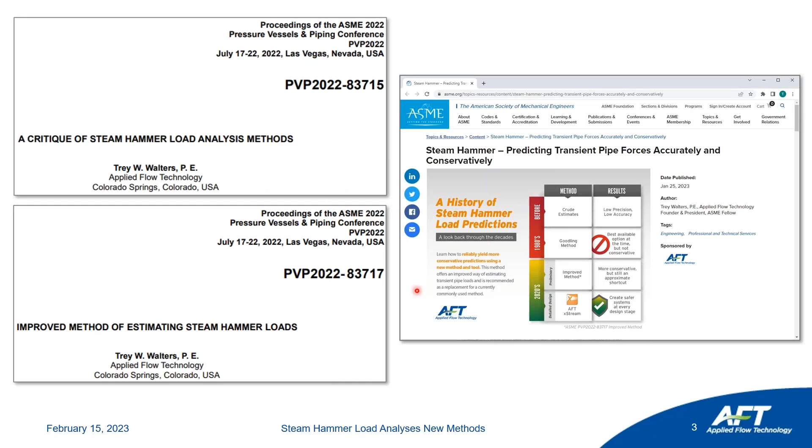So we'll do part one first, which is to critique steam hammer load analysis methods. Part two is going to be quite a bit shorter.

Let's start with the good news and the bad news, beginning with the bad news. The bad news is that forces from steam hammer in nuclear and fossil power stations have been significantly underestimated for the last 40 years.

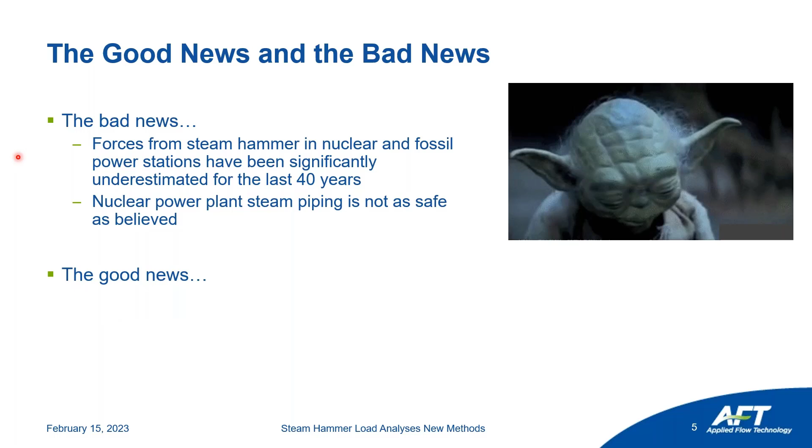Nuclear power plant steam piping that uses these common methods is not as safe as most people believe. But the good news is that new methods and tools have been recently developed which will more accurately and conservatively predict loads on steam piping.

The tool we're talking about more specifically is one we released a couple of years ago called xStream, currently on version 2. Also, thank goodness for the safety factors used on previous designs that helped keep things working, hopefully without any significant issues.

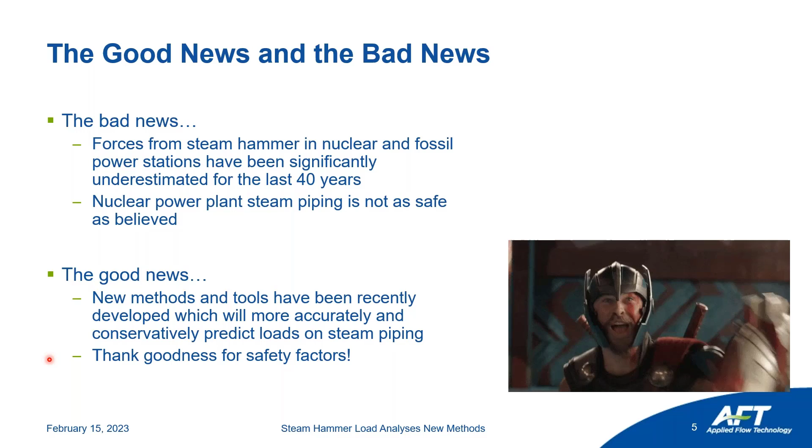But there are safety issues there that we recommend, and I will at the end point people to go back and look at that.

This is a screenshot on the right that I have shamelessly taken from a paper by Rovagnati and Gray, who published a paper at the PVP 2015 conference—there's the reference right there.

They had this graphic in their 2015 paper, basically showing what goes on in a case like a nuclear power plant, where you have steam coming off your steam supply, going through some longer pipes, ultimately into turbines, and then down here you have turbine stop valves.

When there is some sort of upset condition, the goal is to close these stop valves as quickly as you possibly can to protect the turbines.

Typical closure times are effectively about 100 to 200 milliseconds. They actually have longer closure times, but the times that actually drive the steam hammer waves are more like 100 to 200 milliseconds. When that happens, it sends a pressure wave traveling at near acoustic velocity back towards the steam supply.

So a wave is generated at these valves and travels back through the piping towards the steam supply, and any elbow pairs you have are going to see forces. Those imbalanced forces from this transient need to be handled by the structural supports, and this is often called a steam hammer.

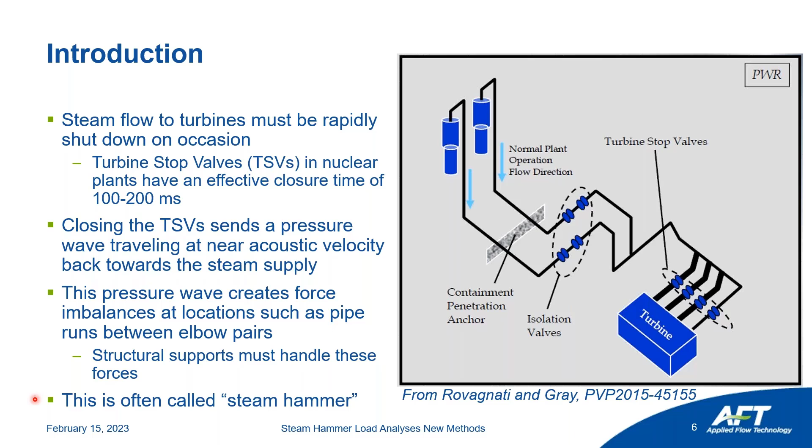Some background: the work in this paper is derived from two occurrences. One is that there were 4 papers at ASME PVP conferences from 2014 through 2018, from multiple authors, which questioned the conventional method based on the work of Goodling, who himself published a paper back in 1989 at a PVP conference. His method, which was certainly an improvement at the time, is something we're going to show today is not as conservative as people thought over the last 4 decades—and we're going to talk about why.

The other development is the new commercial simulation tool, xStream, released in early 2021, designed to simulate specifically transient compressible flow, including steam hammer.

There was also another paper that was supposed to precede these two papers at the 2022 Power Conference, but it got delayed by COVID a couple times. It still hasn't been published. It's called 'How Fast is a Finite Gas Transient Wave and Why Does It Steepen?' I'm a first author on that, and it will be published at the PVP conference this year in Atlanta. So that paper was supposed to come before these ones, but just because of conferences being rescheduled and canceled, it's coming out after.

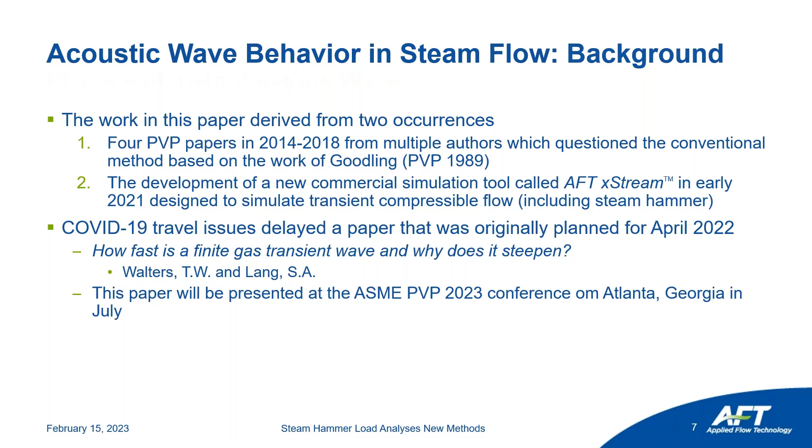Let's talk about acoustic wave behavior in steam flow, and just the physics of an instantaneous wave.

Before considering the flow of real gases with friction and heat transfer, let's make things simple and consider a case with a perfect gas, adiabatic flow, frictionless horizontal pipe. You've got flow coming in from point 1 to point 2, and there's a valve, and what we're going to do is close that valve instantly. So what happens to the gas flow right now? We're not even to steam yet, we've got a perfect gas. So what happens with the physics?

This idealized case has constant thermodynamic and fluid dynamic properties everywhere because it's frictionless. There's a velocity v and a speed of sound c. Assume the valve closes instantly at t equals 0.

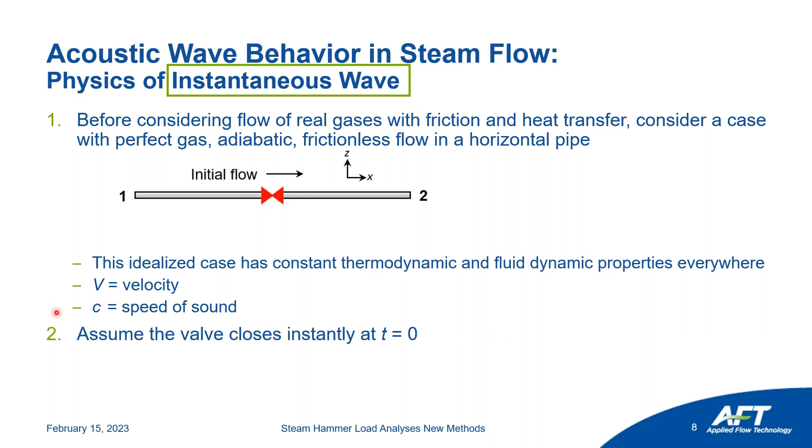There's two waves that are generated that travel upstream and downstream of the valve. Upstream of the valve is a compression wave. That compression wave is traveling against the direction of the bulk fluid flow, the gas flow, and it travels at a velocity of v minus c. C is greater in magnitude than v, so this is actually a negative number, but our coordinate system has x going from left to right, so this is going to be a negative wave speed, and it's equal to v minus c. There's another wave which is generated, and that's downstream of the valve.

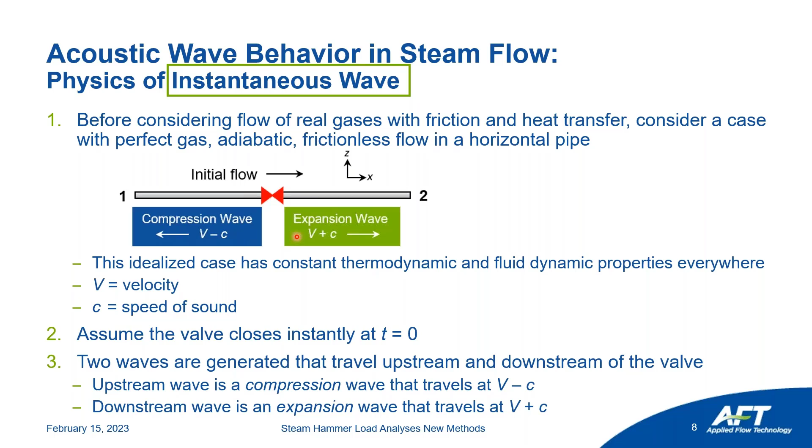That's an expansion wave, and it travels at v plus c, traveling to the right. So those two waves are generated, and in our case with perfect gas, adiabatic, frictionless flow, horizontal pipe, they travel at a constant wave speed, both to the left and to the right.

So let's dig into this a little bit more. We just talked about this. What we're going to focus on right now is more on the compression wave, because that's the one that causes issues with forces on the elbow pairs. Let's take a case where we look at time and distance x along the pipe, and see what the waves are. Here we're going to look at both waves, compression and expansion. Later, we're going to focus on just the compression wave.

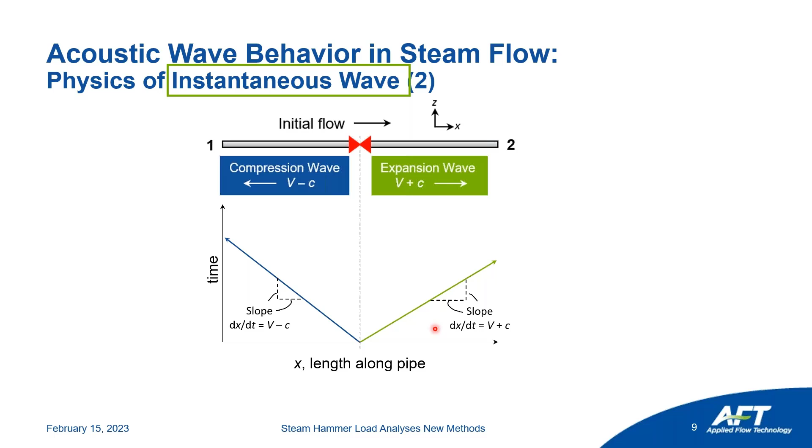This is an instantaneous wave, so the wave actually travels in time over this distance from left to right, and the slope here is the wave speed, and it's v minus c. Now on the right, it is a different slope, traveling at a higher wave speed, which is v plus c. So that's how it travels, and that's the direction of those two waves.

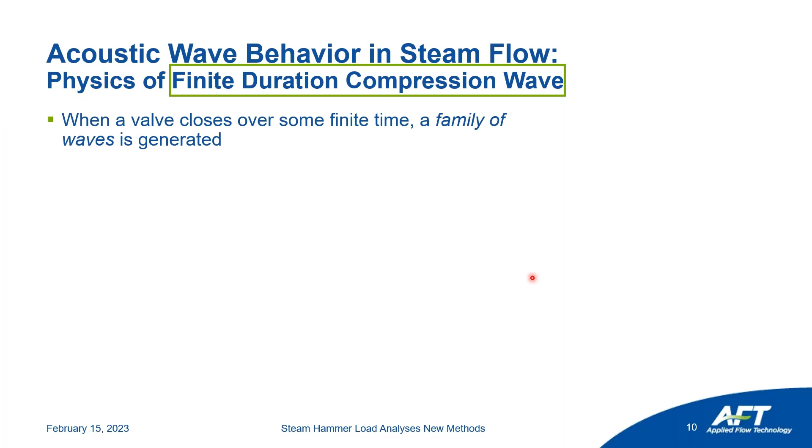Now let's move from an instantaneous wave when we close the valve instantly to a finite duration compression wave, which is what happens when you have a valve which doesn't close instantly, but closes over some finite amount of time. When that happens, there is not a single wave which is generated, but a family of waves. What do we mean by a family of waves? We're going to talk about it here.

We're going to talk about the upstream of the valve now, and not worry anymore about the downstream of the valve. Upstream of the valve, we're going to close this valve, and it's been shown by others in the literature that it tends to be roughly about a constant velocity versus time, fairly linear, and constant flow rate versus time. We're going to assume that this valve closes in such a way that the gas velocity goes from the initial steady state velocity at the valve, and closes over some time tc. Then the valve is completely closed. So let's look at what happens.

We're going to introduce two new subscripts here, F and B. F represents the front of the wave family; this is also the steady state conditions, SS. B represents the back of the wave family. At t equals 0, just before the valve closes, there's no waves being generated. Right when the valve initially just starts its first incremental movement, closure, and there's a change in velocity, a wave is generated, and it travels up the pipe back towards the supply conditions. That wave travels at the initial velocity v minus the initial sonic velocity c - that's the slope of that line.

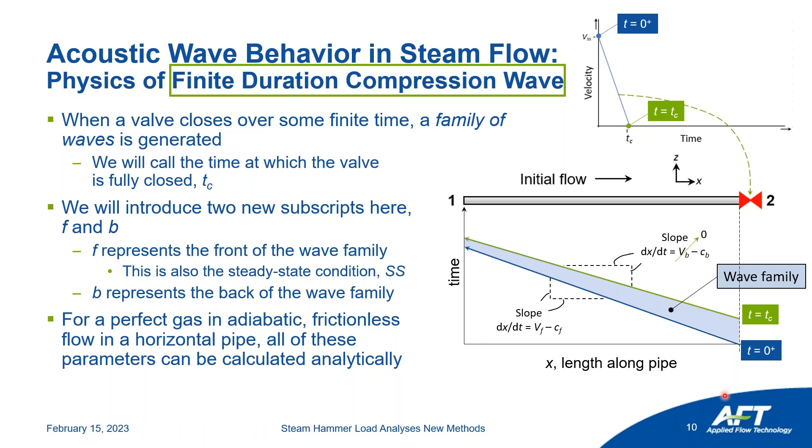So everything that's actually happening here that's interesting happens between the blue and the green lines. For a perfect gas, an adiabatic frictionless flow, and a horizontal pipe, all of these parameters can be calculated analytically.

So what happens when this wave is traveling down a pipe and it goes through, for example, an elbow pair? Let's take a case right here where at the top we have a case where no transient has happened. So there's steady state fluid velocity V, and it's constant because we're talking about a no-friction case. At this elbow pair up here, the velocity is just equal to the steady state velocity, and the pressure is equal to steady state pressure. Same thing down here at point 2, okay, and there's no imbalanced forces.

At some certain time, the valve closes instantly. It's somewhere downstream, and it's generating a wave which is traveling back towards the source. This is the acoustic wave. It's traveling at V, the steady state velocity, minus the steady state sonic velocity C. At this point in time, this gas on the right has been brought to stop.

V equals 0, and the pressure is now at a high pressure. And so this higher pressure here is generating a force, and it's pushing this assembly between these two elbows. It's pushing it to the right because there's higher pressure here than here, and so there's a force that pushes it to the right. And that force can be predicted.

And so with the force versus time profile, you can see when the wave first enters into the first elbow pair, the force goes up. And that force is not exactly equal to, but roughly equal to on a first approximation, the high pressure minus the steady state pressure down here, the pressure difference times the area, okay?

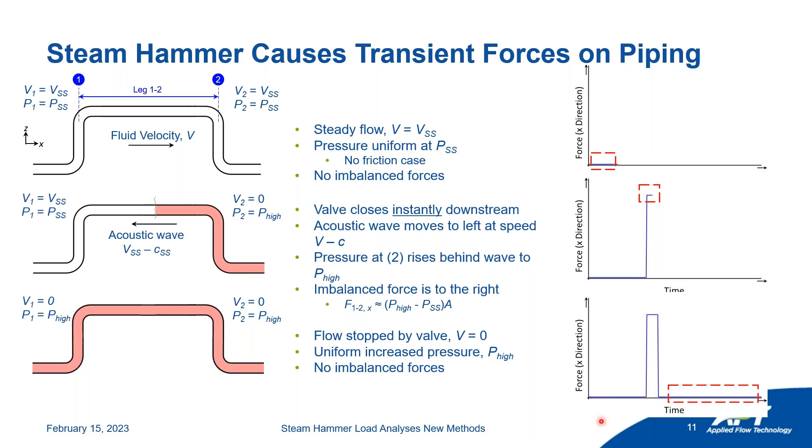All right, so we've created a little video that shows what happens as the wave moves through. I'm going to play this video here. I think I need to change my pointer options to turn off the laser pointer.

Okay, so what you're going to see is initially there's some flow going through. The valve closes, the wave comes in. As the wave goes through there, it causes those elbows to move. At first it pushes it to the right, but then there's a reaction because of the

elasticity in the system, and the elbow pairs move back and forth. Now they're going to move unless they're restrained. If they're restrained, there's not going to be any movement, but the restraints that are put there have to take that load, whatever that load is.

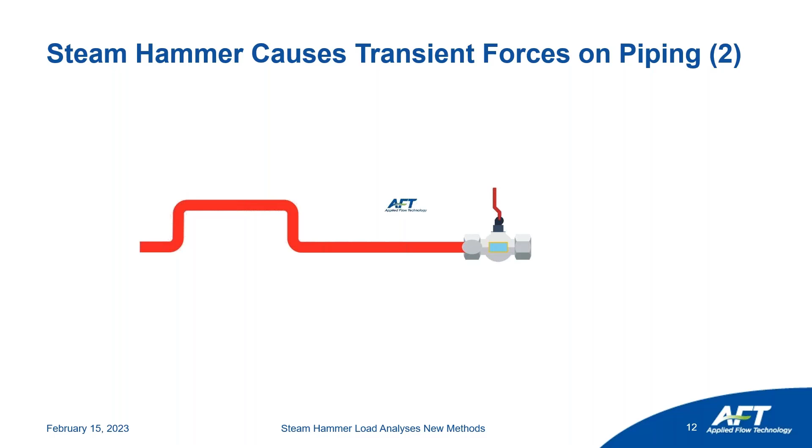So the question is, what is that load, how high is the force, and what does it look like over time? That's really what we're trying to get at today.

So we're going to go on, and if the wave is an instantaneous compression wave, so the downstream valve closes instantly, then the shape of the force versus time profile looks like this. It's like a step change, like a square wave, okay?

Now, that's an idealized case because there aren't any valves that close instantly. So you have a finite duration compression wave where the valve closes over some time, and it looks more trapezoidal like this, okay? So this would be when the first part of the wave family reaches

the first elbow right here. The force starts to go up, then it reaches a peak, and then it comes back down, and this is the point where the back of the wave family passes through the back of the elbow pair over here, and you get a force profile.

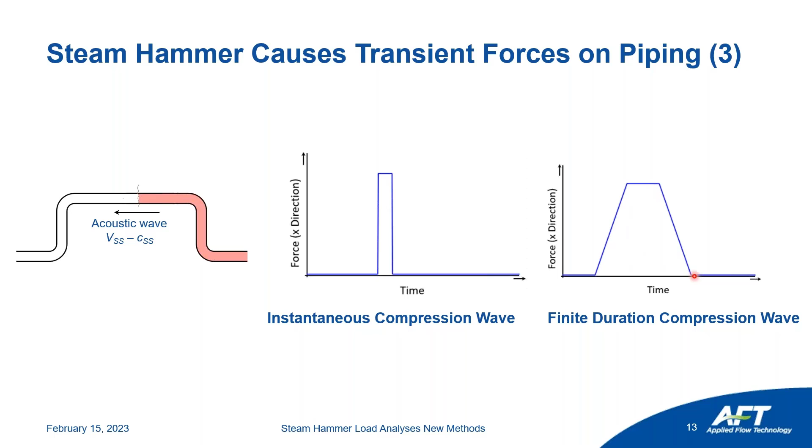So this is more realistic, and then the question is, how do you estimate this or predict what this looks like, and what's the peak force? That's what you care about, right?

So the traditional method is Goodling's method, who was a smart engineer back in the 80s who worked at Gilbert Commonwealth in Pennsylvania. Today, that company is now Worley, owned by Worley in Pennsylvania.

And the way that Goodling's method works is that you estimate a maximum force using a Joukowsky pressure approximation, okay? So what you do is you assume the valve closes instantly, you get a Joukowsky pressure delta PJ, you multiply it times the area, then you put a 5% fudge factor on, and that is the maximum force, okay?

Then you calculate something called the characteristic length. That is based on the steam acoustic speed, C. So it's the sonic velocity, the acoustic velocity of the steam, okay, at the steady state conditions.

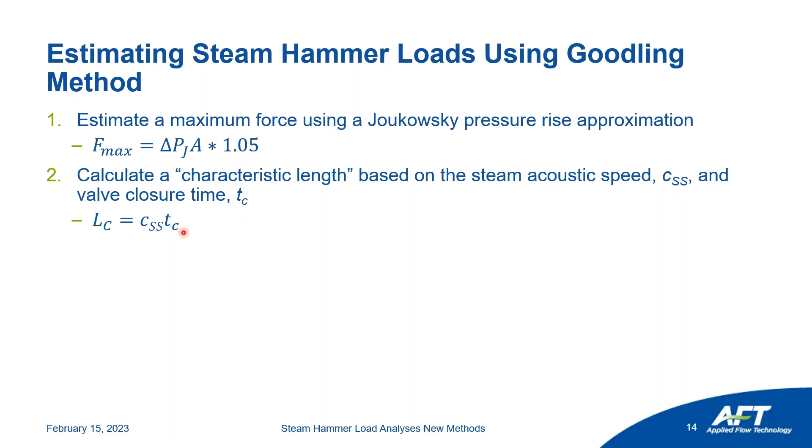And then you take the valve closure time, T sub C, you multiply those and you get something called the characteristic length. You calculate the maximum force on a pipe run leg based on its length.

So you have two elbows here. The length in this leg, we call leg 1,2. The length is L sub leg 1,2.

So that's the length. So what you do is you take this F max up here in step 1, you multiply it by the length of the leg, you divide it by the characteristic length, step 2, and that becomes the maximum force, okay? And if the leg length is greater than the characteristic length, then the maximum force on this elbow pair is just equal to the maximum force.

If desired, it's possible to estimate a force versus time profile that looks like this. And if you go back and look at Goodling's paper from 1989, he described a step-by-step way of how to do that.

Okay, so rather than use a relatively simple, straightforward algebraic form like we just talked about, if you want to get at this in more detail, how do you do it? Okay, so the simplified method is to assume adiabatic, frictionless, perfect gas, horizontal pipe flow, okay?

Steam doesn't really behave that way, but let's assume that it does. If that is how it behaves, then you have the equations of mass conservation, which is pressure versus time, and how it changes over distance with velocity. This is the density of the steam or the gas. This is the sonic velocity, and those have to balance to zero, okay?

Then you have momentum conservation. You can actually do a closed form analytical solution on this and solve for all of the flow field at any point, any location, any time using these two equations right here. But it's very simplified, okay?

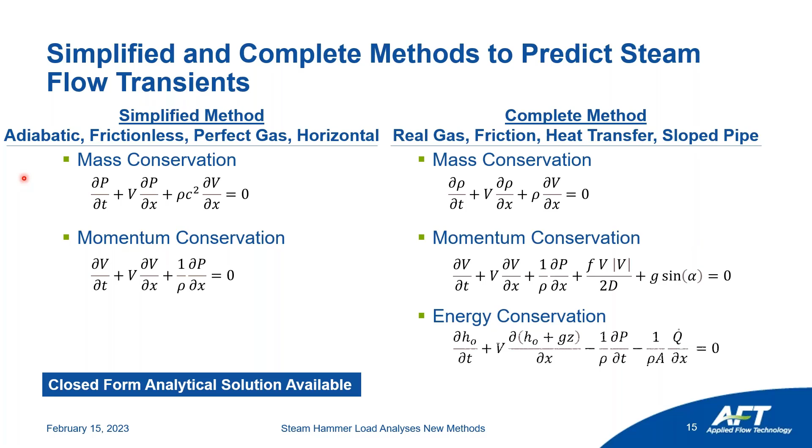So what does a more realistic solution look like? The more realistic solution is we have to bring in more variables here. Now we're talking about real gas, like steam behaves as a real gas. We've got friction, we have heat transfer, and the pipe can be sloped. So that complete method now accounts for everything within these assumptions. And these, you end up with 3 differential equations here: mass conservation, momentum conservation, and energy conservation.

Now, the form of these equations can be represented in different ways. This particular form is a really convenient way that was published by Fred Moody back in 1990 in a textbook that's referenced in these papers. And it's a very convenient formulation. But the only way to really solve these practically is to have a numerical solution. That's the only option, and that's what AFT xStream does. That actually solves all of these equations without leaving anything out fundamentally. So all of the fundamental principles here are included in the solution, okay?

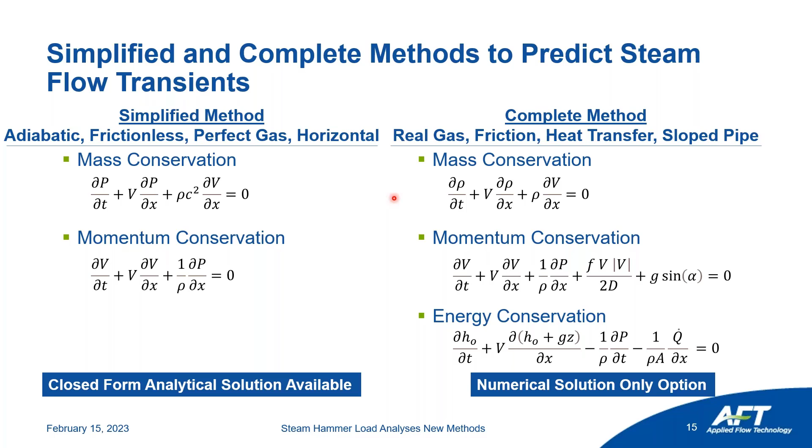So I found out something real surprising a few years ago, almost exactly 2 years ago. It was in early 2021. I was doing some beta testing on AFT xStream before we released it commercially, and I was looking at this problem that Ben Rovagnati and Gray published back at the ASME conference in 2015, and the paper number here. This is basically all the different parameters that they had in their paper, okay?

But the basic gist is that there's a pipe, this is the turbine stop valve right down here. This is the steam supply, at 1,000 PSI. I'm going to talk it in terms of English units, but we've got metric equivalents for everything here, so you can see that if you want to look at that, okay? So the turbine stop valve closes, and it closes in 100 milliseconds. That's what was part of the problem statement that Rovagnati and Gray put forth.

And then along the way, there's these green stretches where there's elbows that are basically 40 feet length on the elbows, and there's longer stretches in between. So there's actually 7 elbow pairs that we're going to look at. The elbow pair that's right at the steam supply, and then further distances out, all the way out almost 2,000 feet away, or 1,980 feet away. Okay, here's the other conditions you have here.

The pipe is a 30-inch nominal diameter pipe. Roughness, temperature, it's just barely above saturation. The flow rate is given here, and other parameters like what's the steady state velocity is 116 feet per second, et cetera, sonic velocity. Okay.

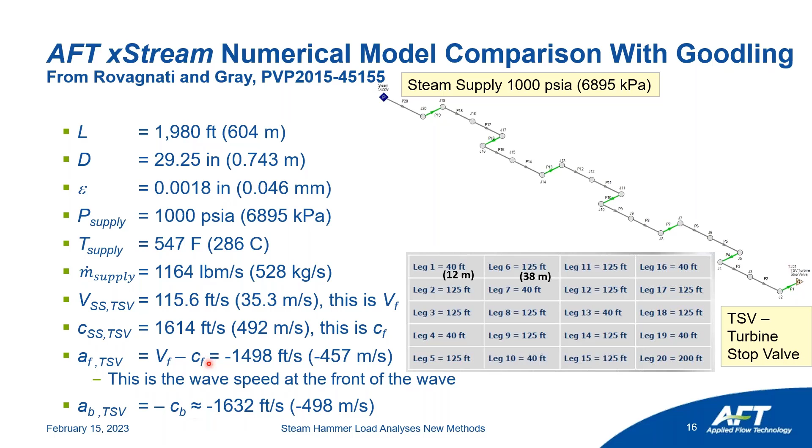The wave speed at the front of the wave is VF minus CF, and VF here is 115 feet per second. C, the sonic velocity, is 1614, so it's actually 1,498 feet per second at the front of the wave. The back of the wave is the minus of the sonic velocity at the back, and you can figure that out to be 1,632 feet per second. So you can see the back of the wave here has a higher magnitude velocity than the front, and that's why the back of the wave catches up with the front.

So this is what it looks like if you do a numerical solution, okay? The numerical solution here, this is where the turbine stop valve is down here, here's the steam supply. And we're going to look at what happens when you close this turbine stop valve over 1/10 of a second, 100 milliseconds. The very first wave is going to travel along the blue line. The back of the wave is the orange line. And this comes out of a numerical solution with AFT xStream, solving all of the real gas friction equations, okay?

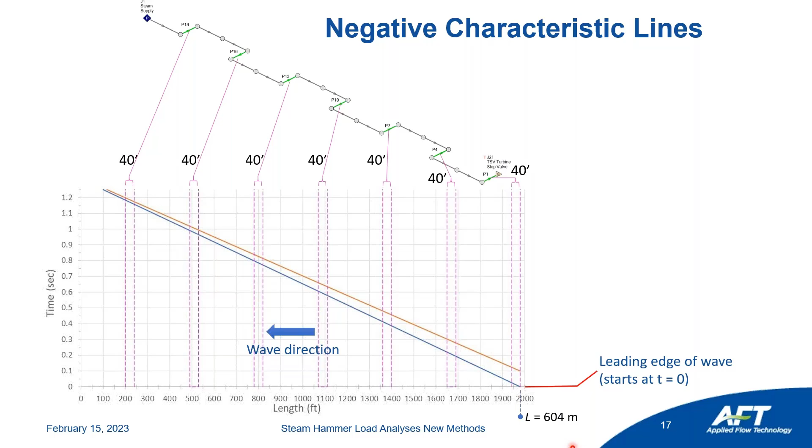Here's the leading edge of the wave. This is the back of the wave at t equals 0.1 seconds. And so those waves travel, and that orange wave travels at a different slope. And you can see as you go further out in time and down the pipe towards the supply, the back of the wave position is catching up with the front. Okay, this initial characteristic length that you can get just by subtracting what happens at 0.1 seconds is about 150 feet.

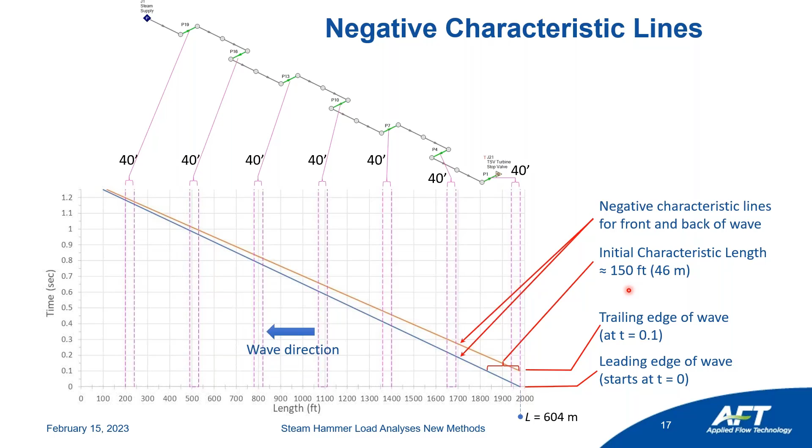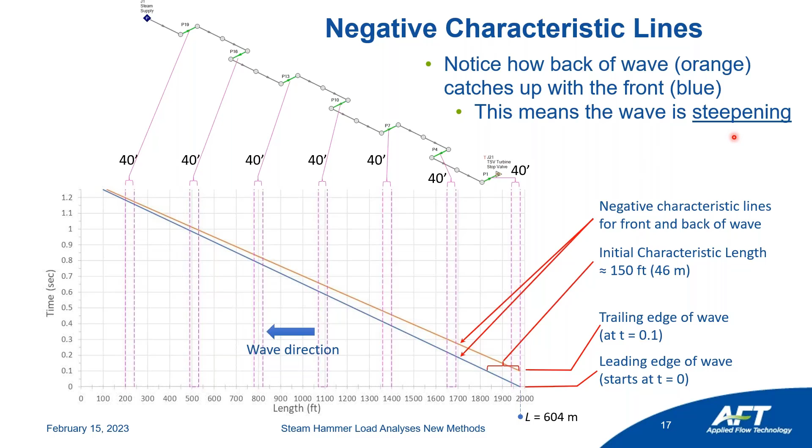You can see the characteristic lines shown right here. The important thing to see is that the orange line is catching up with the blue line, and that means the wave is steepening. So that has implications for the forces we're going to talk about.

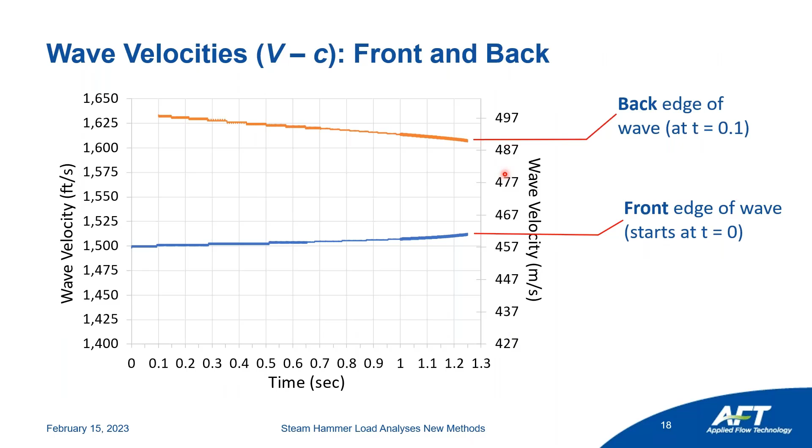What you can also do is take what I just showed you on the previous slides. You could subtract the positions here that you get out of the wave velocity, and you can actually say what is the distance between the front and the back of the wave.

At 0.1 seconds, when the turbine stop valve fully closes, you can see that distance between the back of the wave and the front is about 150 feet right here. But what happens is because the back of the wave is catching up with the front, as you go forward in time, the distance between the back and the front shrinks.

And so finally, you can see if you go out far enough, the back of the wave will catch up with the front of the wave, and it becomes basically a vertical shock wave. What this tells us is that the whole idea of characteristic length, which assumes this 150 feet is constant, is a flawed concept, and the engineering community should discard that concept.

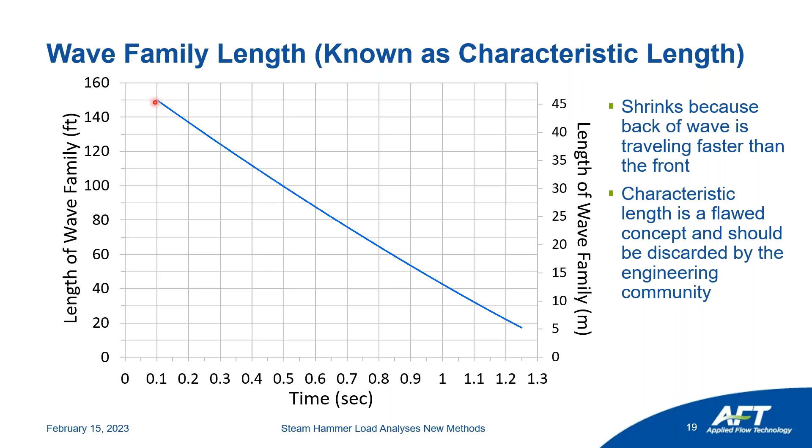There is no characteristic length. It does not exist. There's an initial length between the front and the back of the wave, but as time goes on, the back of the wave catches up with the front, and there is no characteristic length. There's a changing distance between the front and the back. And you can also see this in a numerical solution from AFT xStream.

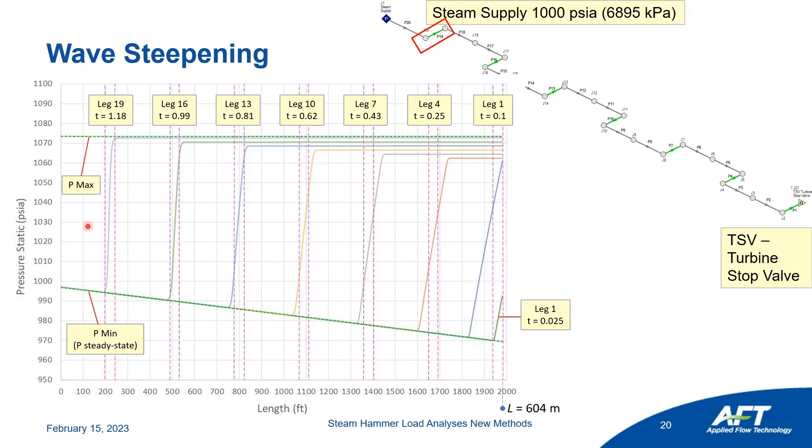What you can see is more and more of this wave is fitting inside this 40-foot length between the front and the back of the wave family. And if you get all the way down to this final elbow pair, the entire wave is inside that elbow pair, because the back of the wave has caught up with the front. What that means is the force is much higher.

So we can look at what those forces look like. I'm going to play you a quick animation here. This comes out of xStream, which can make this animation for you, and I'm going to go ahead and play that for you here real quick.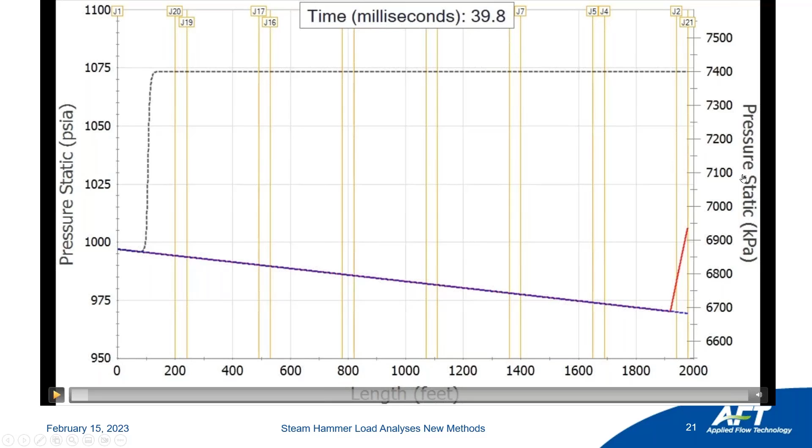So this is what happens with the pressure. Here it's in PSI, and this is kilopascals on the right, over the entire distance right here. You can see, and time is up here at the top in milliseconds. You can see as this wave goes down, it's just getting steeper and steeper and steeper. And that's just because the back of the wave is catching up with the front.

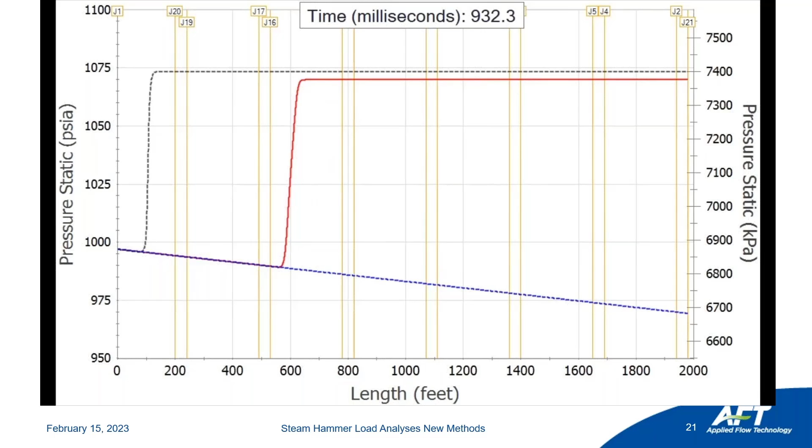All right, so let's go on from there. Now you can come in and look here at what's going on with the forces.

The interesting thing you see is that the forces on leg one, the first elbow pair, are about 15,000 pounds force, something like 60 kilonewtons. But because more and more of the wave is fitting in each leg—leg 4, leg 7, leg 10, all the way to the end—the force gets higher and higher.

The interesting thing here is that Goodling's method, which was developed four decades ago, predicts that the forces for all seven elbow pairs should be the same. But you can see that the elbow pairs further away from the source are much higher than Goodling would predict. That's why we're saying Goodling's method is not a conservative method. If you've used Goodling's method in the past, or you're using it today, you're not getting conservative results.

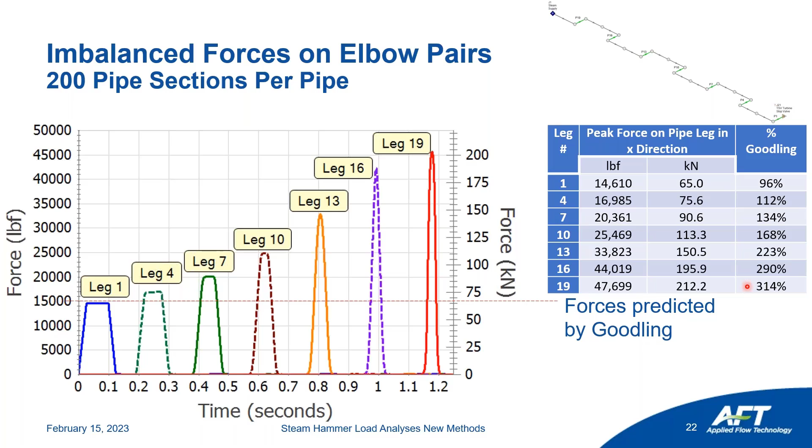These are the force predictions of these peak forces in a table—forces for leg 1 all the way up through 19, and this is the percent of Goodling. You can see that the forces on the final leg, leg 19, are over 3 times higher than Goodling would predict. So that's a little bit concerning.

There is some sensitivity to how you do computational sections in the AFT xStream model. As you add more sections into the pipes, the peak force that you get increases. So to get the peak forces you're seeing here, you need to use even more sections. When Ravignati and Gray did their paper back in 2015, they only used 40 sections and they didn't do a nodal sensitivity study.

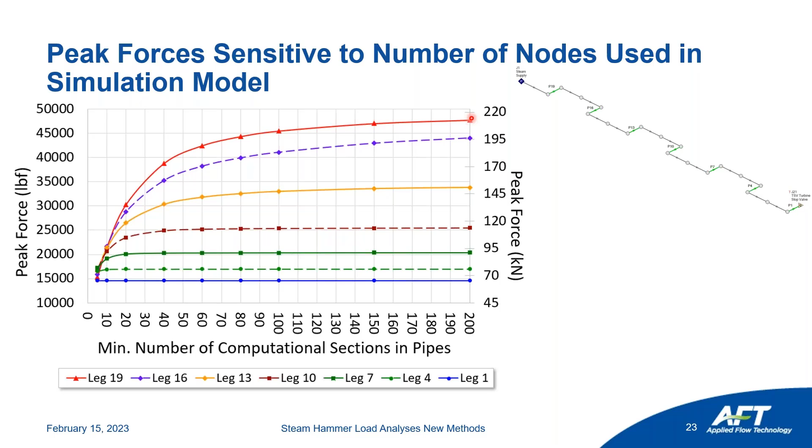So they were showing higher forces, but actually the story is even worse than Ravignati and Gray presented back in 2015, because if you put more sections in the numerical model, you get even higher forces. So be careful if you're ever using numerical methods to make sure you're using enough sections.

So how fast do the waves steepen? This is another way of asking how much faster is the back of the wave than the front. We looked at this chart earlier of the front of the wave family and the back of the wave family. The difference in speeds decreases over time in this example.

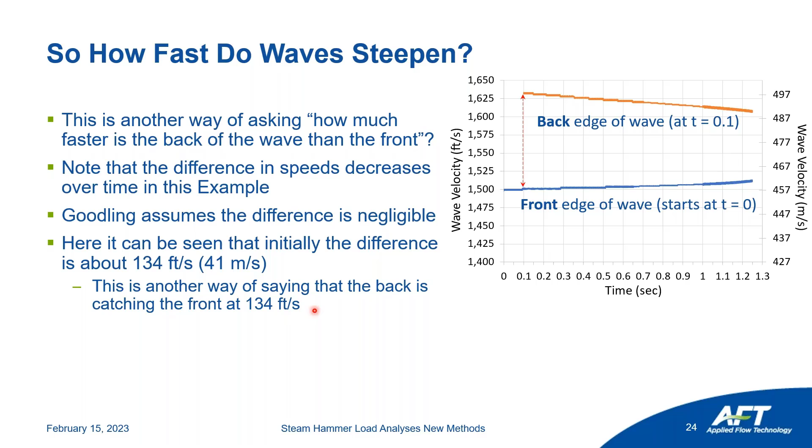Goodling assumes this difference is negligible. Here it can be seen that the difference initially is about 134 feet per second. So this is another way of saying that the back of the wave is catching up with the front at 134 feet per second.

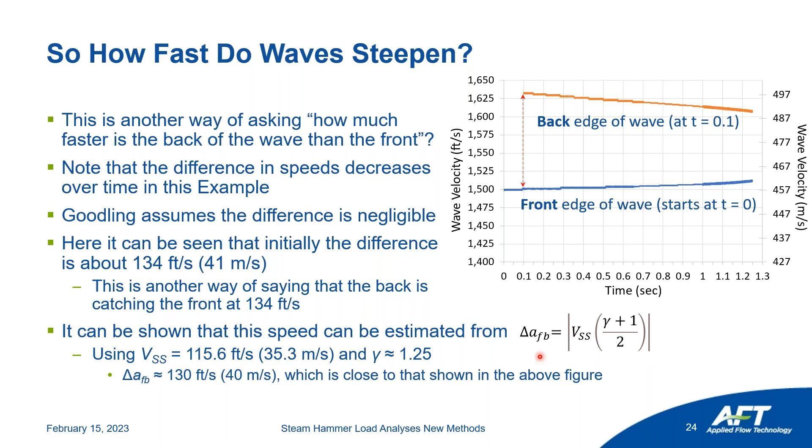It could be shown that this speed can be estimated from this equation that we develop in our papers, and using the initial velocity of the steam of 116 feet per second, a gamma value of 1.25 for steam, you get an initial velocity with this equation of 130 feet per second, which is pretty darn close to the 134 that comes out of the full numerical simulation. This simple equation tells you how fast the back of the wave is catching up with the front.

So some fundamental problems with Goodling's method that have become clear in recent years: it tacitly ignores wave steepening, it doesn't acknowledge that it can occur, and it assumes that the forces on the pipe run lengths are the same regardless of how far the elbow pairs are from the source of the transient. It actually miscalculates the characteristic length because it uses acoustic velocity C, when it should be using the wave velocity A. That's typically a difference of about 10%, but that's another problem with Goodling's method.

It uses an incomplete force balance based only on pressure differences, on the pressure between the elbow pairs. And there are other parameters that go into that.

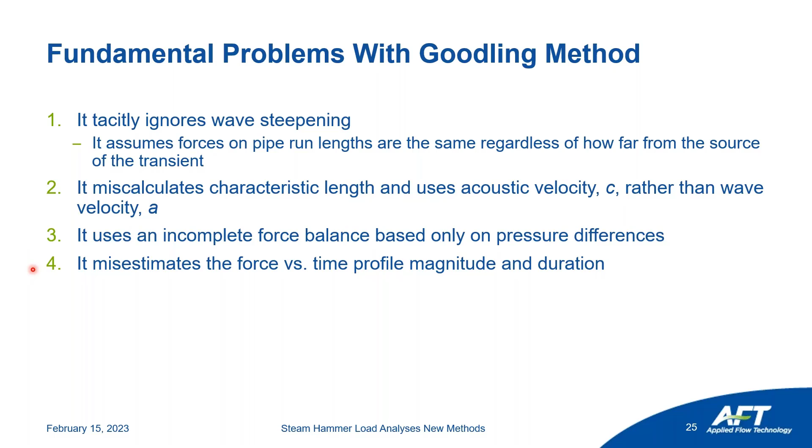If you care about that, we have other webinars and papers that talk about how to do a complete force balance. AFT xStream does a complete force balance—there's not leaving any terms out. It also misestimates the force versus time profile, magnitude, and duration.

What did Goodling miss on wave steepening? What did he ignore? The relationship for how fast a wave steepens is roughly given by the sonic velocity at the back of the wave minus the sonic velocity at the front, plus the initial fluid velocity, just the bulk velocity, about 130 feet per second. Goodling and others afterwards estimated this value, but they ignored the bulk velocity term and only took the difference in sonic velocities.

That's like 14 feet per second, which is really slow, so they said wave steepening isn't very important because it only happens at 14 feet per second. But if you actually get the full estimation of the change in wave velocity and how fast it steepens, it's actually 130 feet per second—about 10 times as high. So wave steepening happens 10 times as fast as other people have estimated, and that's why this has really kind of been missed over time.

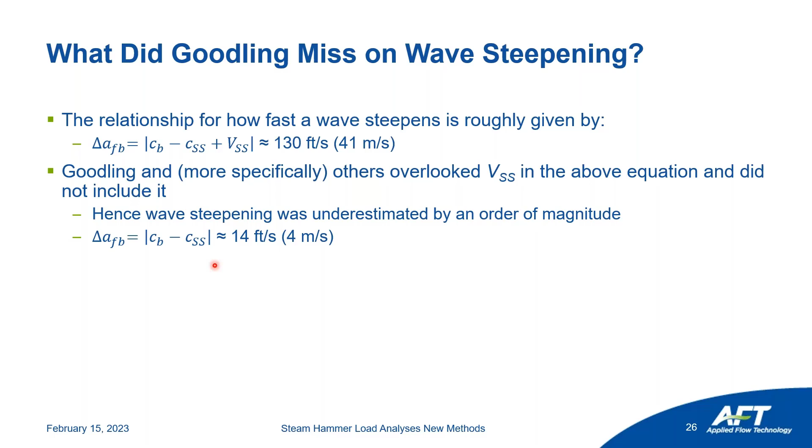So, conclusions on part one: the Goodling method is not reliably conservative. It should not be used for steam piping load estimation, except maybe if you have very short pipe runs where there's not enough time for wave steepening to really have an effect.

Going forward, engineers should consider using a capable simulation tool such as AFT xStream to determine peak loads and load profiles. Engineers should take care to check peak forces and nodal sensitivity—don't just believe what comes out of a model in the simulation. With xStream or any other software, make sure you check nodal sensitivity.

For quick preliminary force estimates, an alternative method should be considered which includes wave steepening effects. I'm going to talk about that in part two.

Existing systems designed using Goodling are not as safe as believed, and we would definitely recommend that existing systems be reevaluated with some of the new things we're talking about here today, and in the papers from the PVP conference last year that I published, and that they should be strengthened where they realize they were not designed with appropriate peak forces.

That's what we would recommend to the entire world that has used Goodling to design their estimate forces and to design their pipe system and pipe restraints—that they might have underestimated those peak forces, so go look at it again.

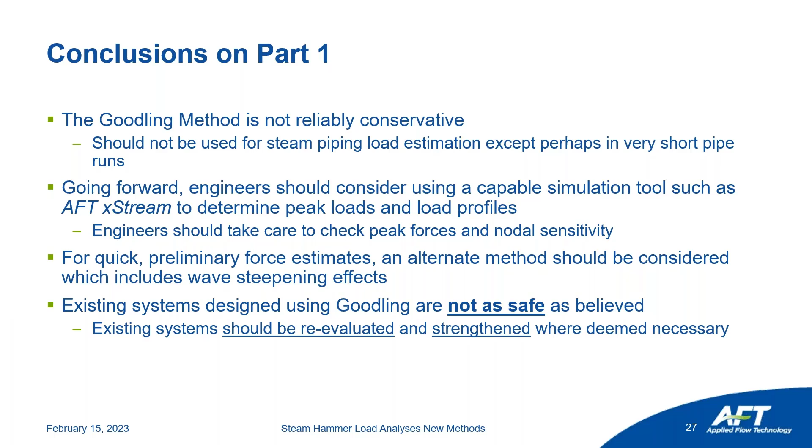Okay, so part two is an improved method of estimating steam hammer loads. If you want to get the full correct answer, AFT xStream can do that. If you model it properly and check nodal sensitivity, it can do all the real gases, heat transfer, friction—all of that.

But there are some ways that are better than Goodling that you can use to get an estimate. It's a pretty quick algebraic form—a little more complicated than Goodling, but much better at handling wave steepening. I actually developed this last year and published it in the other paper; this improved method. I'm going to talk about how the improved method works.

First, recommendations on predicting steam hammer loads: there are many variables that can influence steam hammer wave propagation and imbalanced forces. It's highly recommended that if you want to get it right, you use a capable simulation tool such as xStream, which can simulate wave steepening, other behaviors such as wave reflections in your system, and calculate a complete force balance. Engineers may still benefit from a simplified method.

We don't have time to go look at everything with xStream—we only have some bandwidth. Is there any way for us to get some quick estimates? Be very careful with any algebraic equation used to simulate this, because it's a very complicated thing to calculate and simulate. So I'm going to give you, as the paper does, a better algebraic way than Goodling.

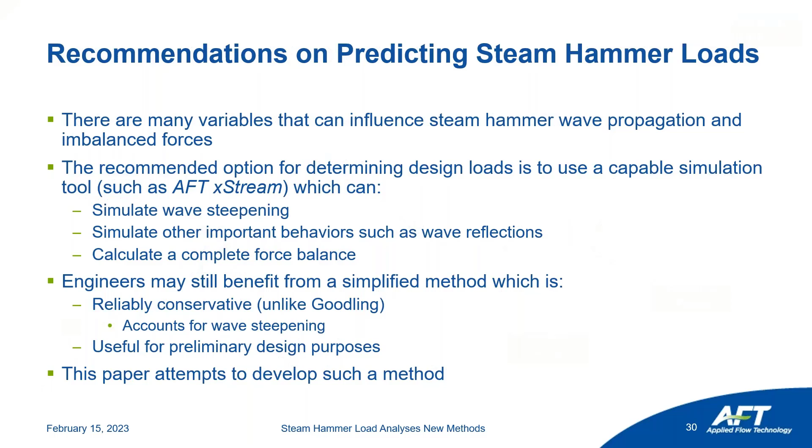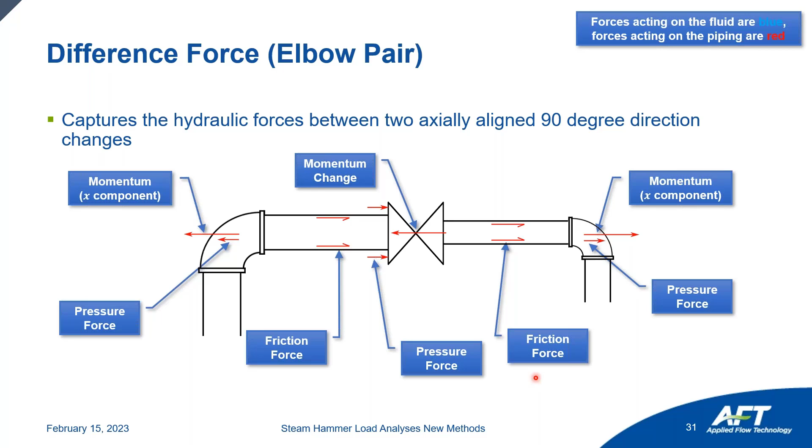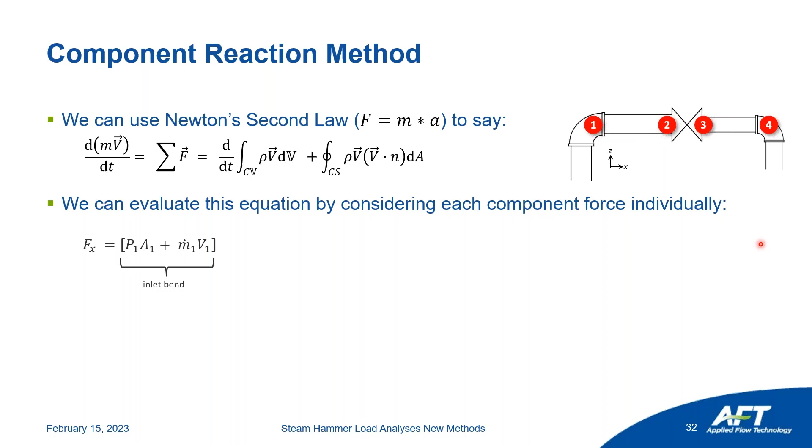That would be the forces at 1, 2, 3, and 4. At the first elbow pair, you get a force due to the pressure, and you also get a momentum change, m dot 1. Then you have a force that's due to the friction on the piping, on the pipe walls.

This is all stuff we're only calculating in the x direction. X is positive going from left to right. So at this moment, we're only talking about forces in the x direction. So you have that force, which is basically all the frictional resistance times m dot squared. And summing that up, it is a continuous function.

If we break the pipe up into discrete elements, we're going to add up all of these contributions from all the discrete elements from 0 to n, that's the pipe sectioning. Then there are pressure changes and momentum changes across the valve that you have to account for. There's more friction in the downstream pipe. And then finally, there is pressure at the end elbow and momentum change there.

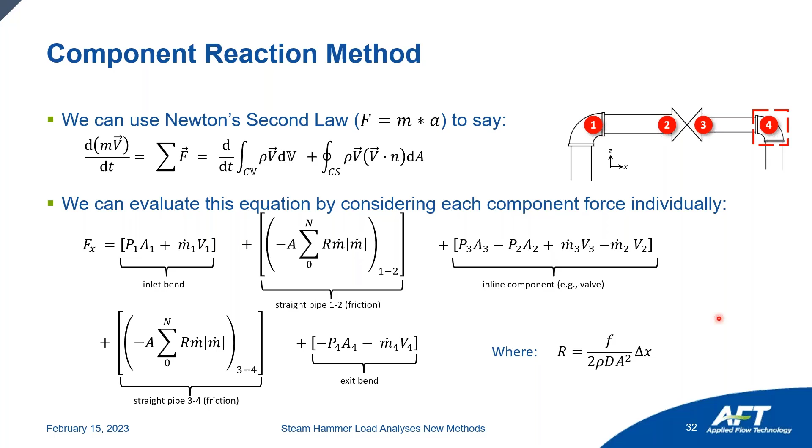Okay, that's something that we now call the component reaction method. We use this in our AFT Impulse water hammer software, but it was kind of complicated to actually use this formulation of Newton in AFT xStream. So we did something different. We did something that we call the acceleration reaction method.

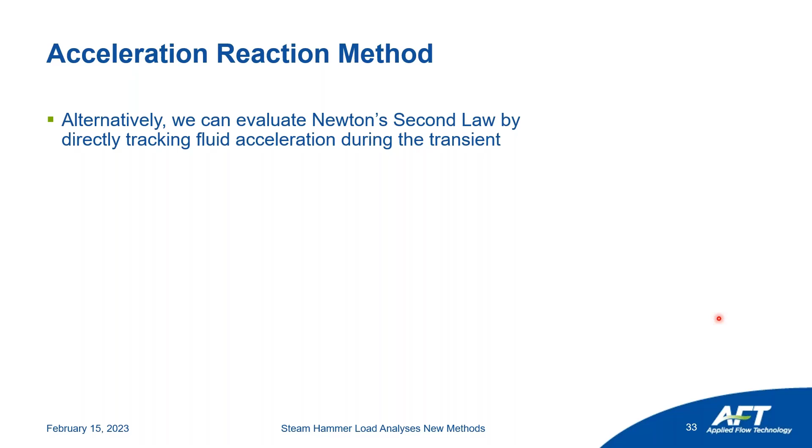You can evaluate Newton's second law by directly tracking fluid acceleration during the transient. There's a different way of drawing basically essentially a control volume. If you draw a different control volume, then you can get the same exact force, but by only tracking acceleration changes, which is the change in m dot over delta t times the distance step of the pipe section.

So basically what we're talking about is what are the mass changes with time in each computing section from 0 to n in the beginning pipe and the end pipe. And if you add all that up, you can get the same exact force. We can show that you get the same force as doing things in the first method, the component reaction method.

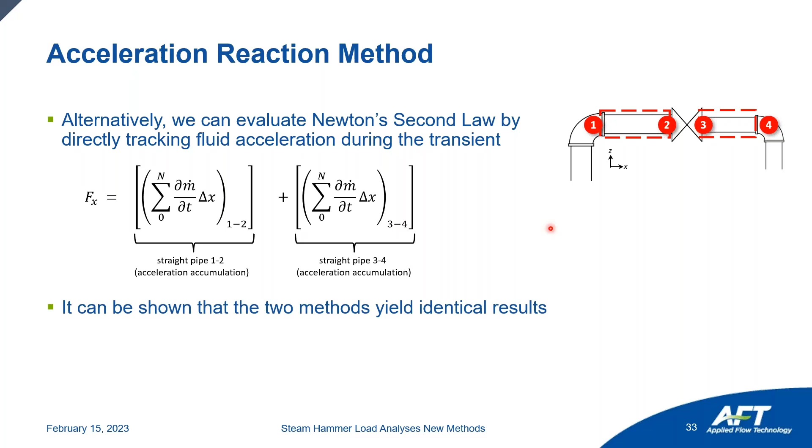It turns out that in a lot of cases, a lot of these terms are negligible, but they're not always negligible. And sometimes they can be really important, and you can be really, really off if you neglect them in some cases. So you got to be careful about that. And we would recommend you just don't do that. Don't use P times A, okay?

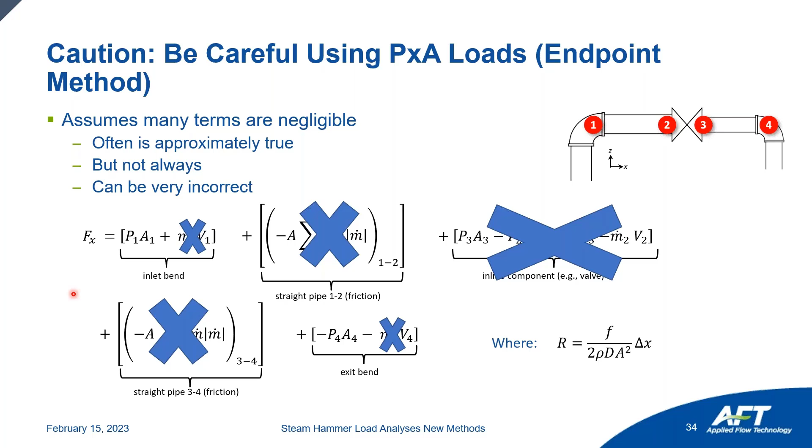So this was the Goodling method we talked about in part 1. These were the forces I talked about in part 1. We already looked at all this. What can be retained from the Goodling method?

In this new improved method that I proposed in the PVP paper from last year, we're going to keep the general idea of characteristic length, but we're going to rename it and treat it as a variable, not a constant. We're going to only use pressure forces to determine forces, because we're trying to get a quick approximate method, and pressure forces are often the dominant forces. They're not always, so this is just an estimate. We're going to continue to use the Joukowsky equation to determine maximum force, and we're going to construct a force time profile based on the length of the pipe run and wave speed.

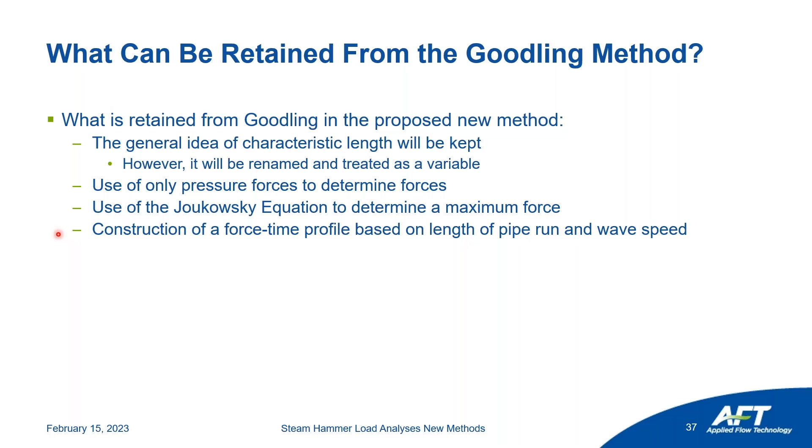If this happens to be frictionless — assume for the moment frictionless adiabatic flow of a perfect gas in a horizontal pipe — you can get analytical relationships like this for the time to get to t shock and the distance from the valve to the shock wave. So this is what we looked at in part 1; here on slide 38 is an analytical solution for the frictionless adiabatic flow, perfect gas, etc. These lines are linear.

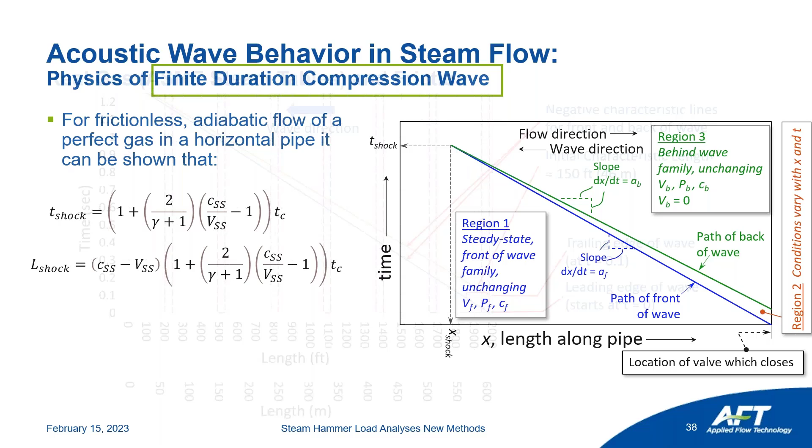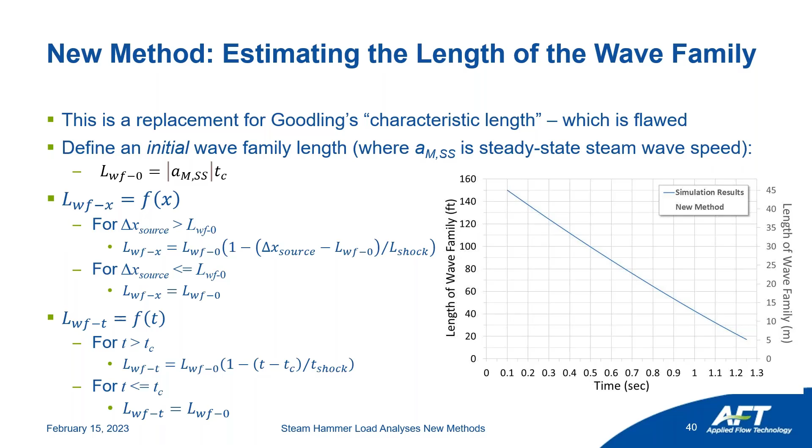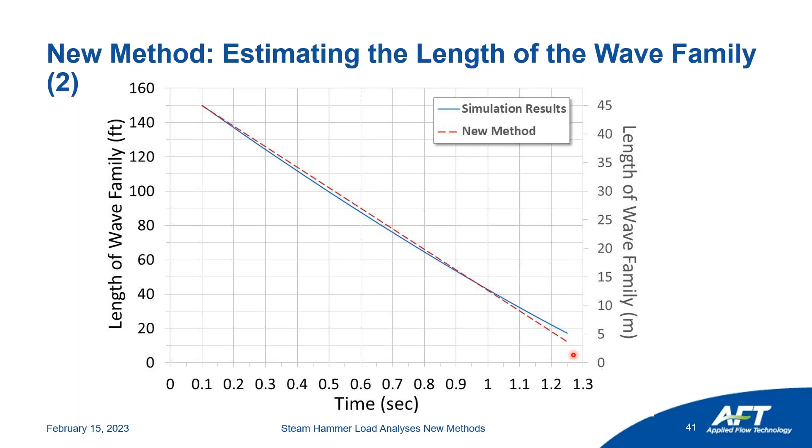I'm not going to get into all the details, but you can go in using all initial conditions, everything in steady state — this is the wave speed A during steady state and the closure time of the valve. You can apply algebraic formulas, a little more complicated than Goodling but not that complicated, and get another line to approximate the blue line. If you do that, this is what it looks like: blue line is AFT xStream results, the method I just showed is linear, approximating the blue wave family length with the red line. You can see that's not a bad approximation, and we can use this to estimate forces.

So the new method that I proposed in the paper is that you get Joukowsky's equation again — the density of the steam times the sonic velocity and the velocity change, that's delta Pj — to get a maximum force. This is really the same thing as Goodling, except Goodling puts a 5% fudge factor, and we're saying we don't need a fudge factor because we're going to account for the wave steepening. So we take the delta P, the Joukowsky pressure, times A, to get a maximum force on each leg.

It's based on the distance from the source of the transient, so this is now a variable, not a constant, because this leg, this wave, the distance in the wave family length is what we call it here. It's a function of time and distance. So this F leg is going to change. The length of the leg might be the same 40 feet as you go down, but this wave family length changes according to what we showed previously.

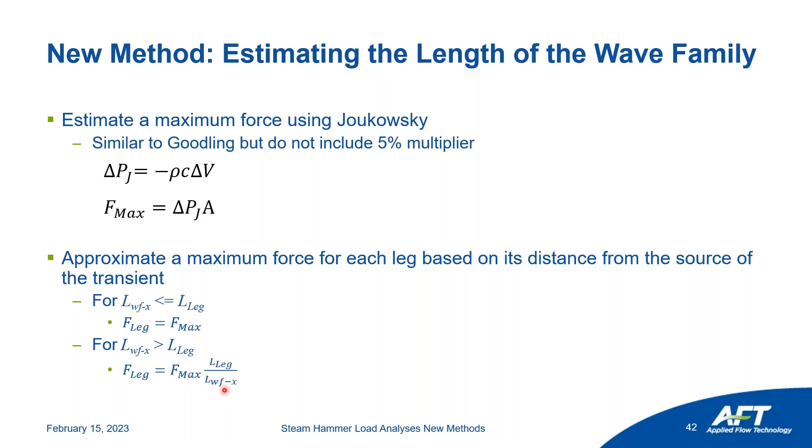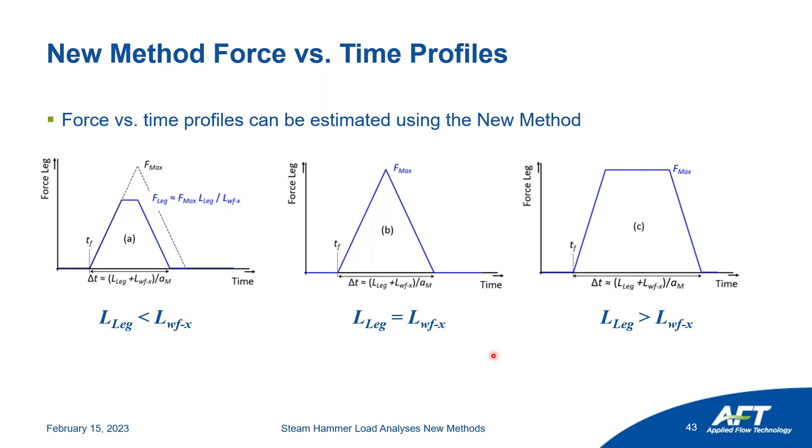You can get force versus time profiles estimated with this new, improved method. The blue is basically just the F leg times the max times the length of the leg divided by this wave family length, which is different at each location. This is if the length of the leg is less than the wave family length, this is if it's equal, and this is if the length of the leg is greater than the wave family length. You get these leg force versus time profiles out of these different shapes.

Highly recommend you don't use it for final design, but it is a preliminary algebraic form that you could use.

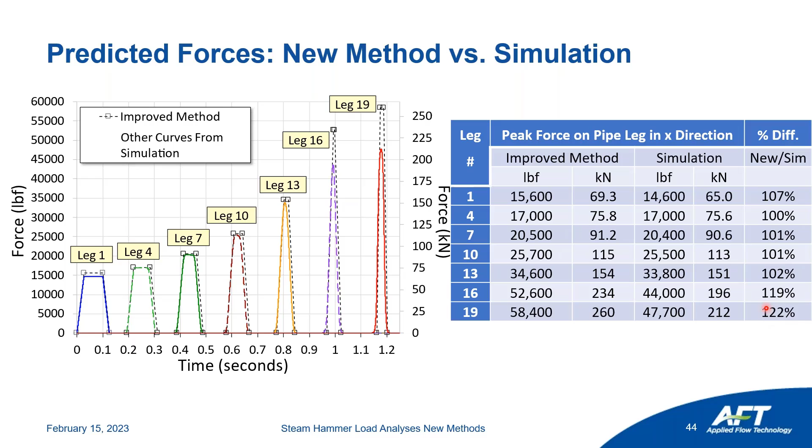So the simulation results we talked about already, and the algebraic method proposed, which we call the improved method, compared to the simulation results, you can see on this first wave it's about 7% higher on the forces, but as you go through legs 4, 7, 10, and 13, it's not that much higher. Where it's really quite a bit higher is at leg 16 and leg 19, like 20% higher. So at least in this example, the forces are over-predicted. The improved method presented in the paper and here today is higher in some cases by up to 20%, but at least it's conservative.

Conclusions from part 2: a new method of estimating steam hammer loads is proposed today, and also was in the ASME PVP paper from last year's conference. It's more conservative than previous methods such as Goodling. It appears to be more conservative than AFT xStream simulation results, but not excessively so. But we haven't tested this out on that many things, so we can't say this is always true. Everything we've looked at so far, it is, but you can't count on it always being true.

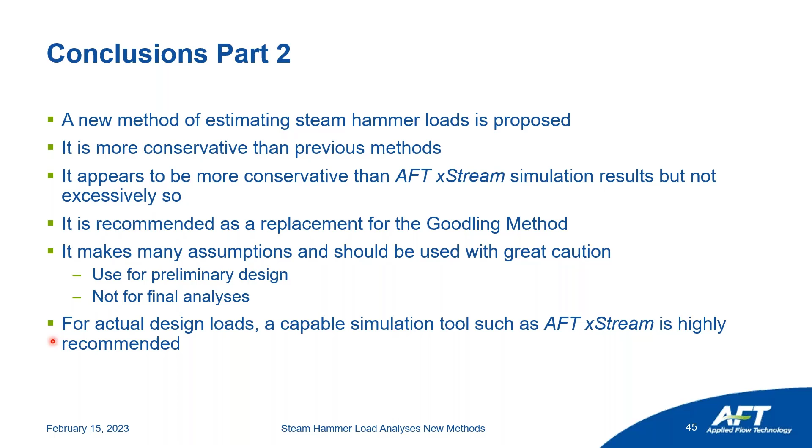Which is why you've got to be careful using this improved method for final design. The new method is recommended as a replacement for the Goodling method. We would recommend people don't use Goodling anymore, use the improved method instead, it's going to be more conservative. The improved method does make many assumptions and should be used with great caution. Use it for preliminary design, not for final analyses. For actual design loads, you really should use a tool like AFT xStream because it's going to give you the right numbers without assumptions built in.